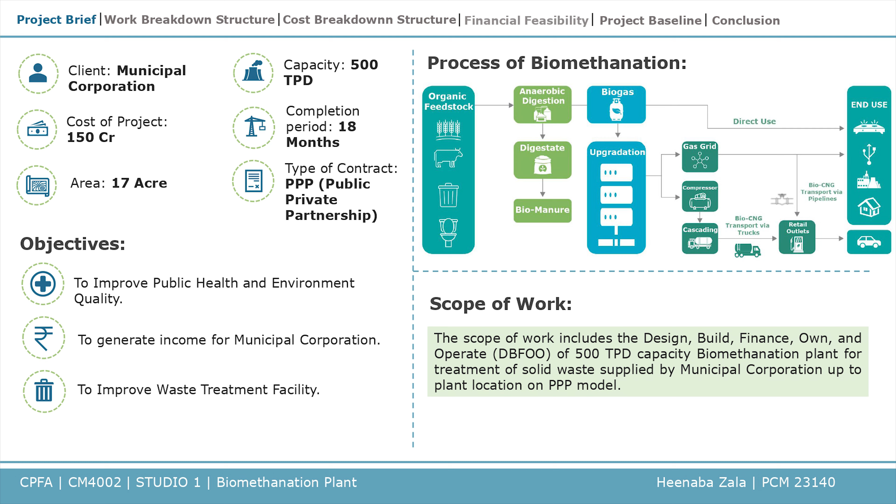Beginning with the work breakdown structure, this is an essential roadmap that breaks down the project's tasks into manageable parts. It helps us plan, organize, and track the work by dividing the project into smaller, more easily manageable units, which simplifies project management and resource allocation.

For our project, I have structured the work breakdown into phases: planning, development, design, construction, and operation and maintenance. In the planning phase, the feasibility study is conducted. In the development phase, both the client and PPP developer are involved, responsible for procuring architectural, structural, and MEPF consultants, as well as material and equipment suppliers and project management consultants.

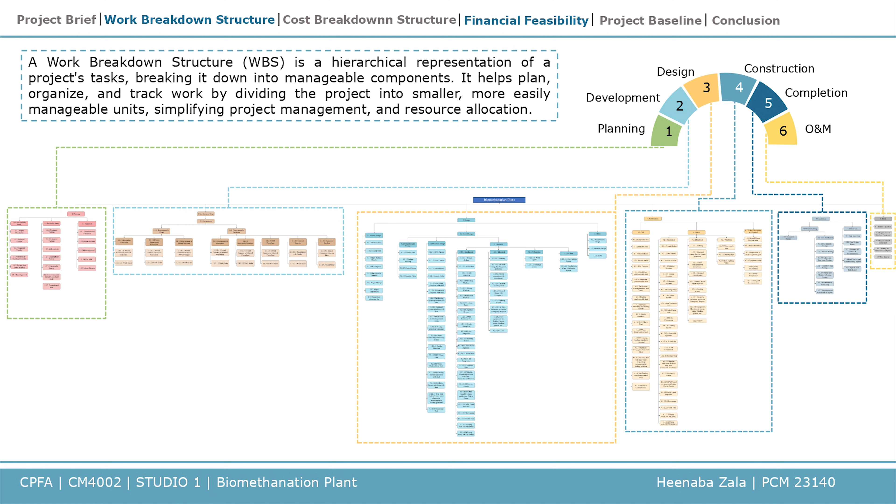Moving to the design phase, it includes structural, architectural, and MEPF design and detailed design processes. In the construction phase, it comprises civil and MEPF works with the project management consultant monitoring the project. In the operation and maintenance phase, this includes routine operations, repair of civil and mechanical components, cleaning of the digester, and staff training.

Moving on to the cost breakdown structure, these segments outline the financial aspect of the project. I am presenting the various costs involved, from material to labor, and how they contribute to the overall budget. The project costs are distributed across different phases aligned with the work breakdown structure. 0.4% of the total project cost is allocated for the inception phase, 2% for the development design phase,

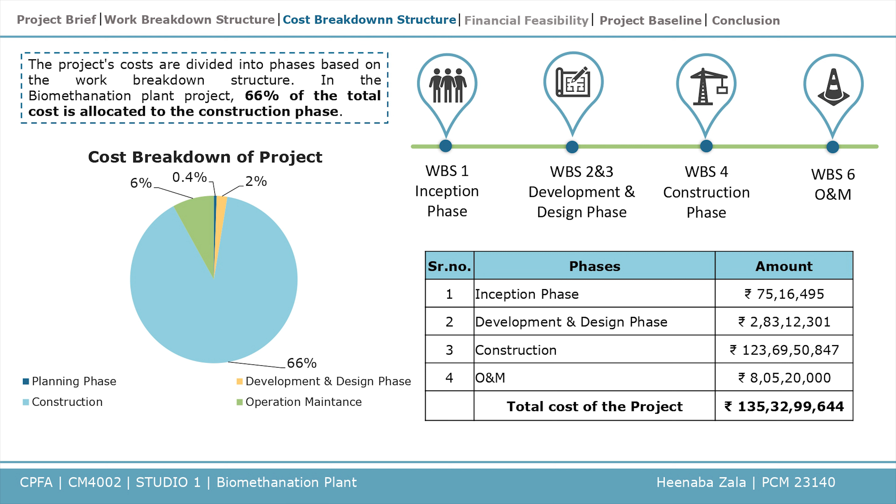and a significant portion of 66% is allocated for the construction phase. As for the operation and maintenance phase, I have considered only the first year cost, which contributes 6% of the total cost of the project. Through this process, I have determined the total project cost is rupees 135.32 crore.

Moving on to the detailed cost breakdown of the planning phase, 89% of the total planning cost is allocated for the feasibility consultant, while 11% is allocated for the approval process. These amount to a total planning cost of rupees 75.16 lakhs.

In the development phase, it is assumed that the notice inviting tender will be published in the newspaper at a cost of rupees 590 per square centimeter. So for a space of 100 square centimeters, the incurred cost is rupees 21.38 lakhs.

Moving to the design phase, 3% of the total design phase cost is set aside for the architectural consultant, 5% for the structural consultant, 14% for the MEPF consultant, and the majority, 78%, is allocated for the project management consultant.

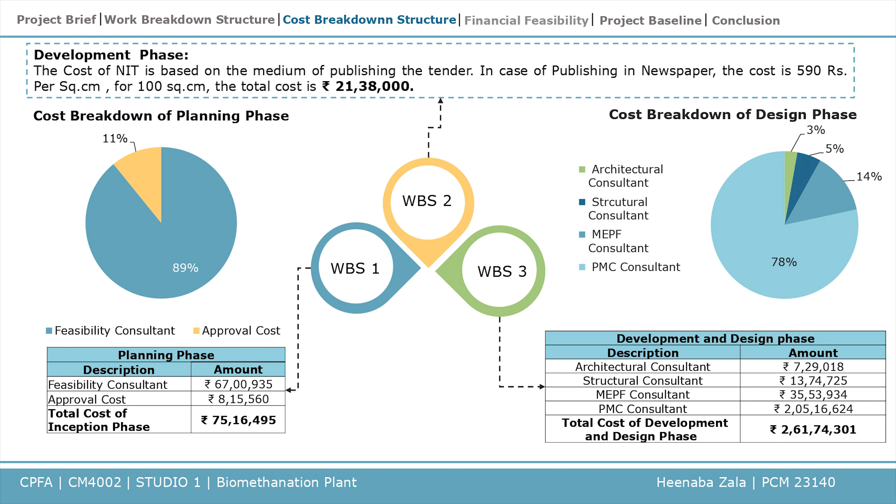In the detailed cost breakdown for the construction phase, 1% of the total construction cost is allocated for plumbing work, 25% for civil work, 24% for electrical work, and the remaining 50% for mechanical work.

This results in a cumulative construction cost of rupees 123.69 crores. Turning to the cost breakdown of the operation and maintenance phase.

In the operation and maintenance phase, 19% of the total operation and maintenance cost is allocated for the manpower required for plant operations, while 18% is allocated for repair of mechanical and civil components, and the majority, 63% of the cost, is reserved for electrical consumption necessary for plant operation. This totals an operation and maintenance cost of rupees 8.05 crores.

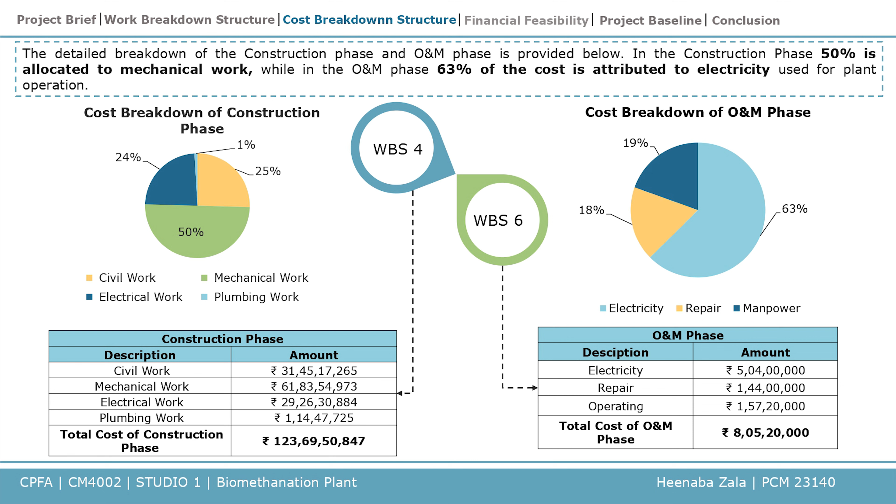Financial feasibility is used to find out whether the project is financially viable or not. An organization can make a decision with numerical values in terms of profit and loss by considering the economic feasibility. To assess the financial feasibility, I have made key assumptions.

In the first year, bio-CNG production is set at 67 lakhs 1400 kg, which is to be sold at rupees 46 per kg to CNG stations. Production is expected to decrease by 3% every 5 years due to machine wear and tear.

In fertilizer production, in the first year, it is projected to be 1 crore 82 lakhs 50,000 kg, which is sold to the fertilizer company at rupees 8 per kg over a period of 20 years, and there is an anticipated 5% reduction in production every 5 years due to machine wear and tear.

An annual royalty will be paid. Royalty payment of rupees 2.52 crore will be paid to the municipality corporation over the period of 20 years, and the operation and maintenance expense is estimated at rupees 1.44 crore with a 2.5% increase every 3 years.

Additionally, we have assumed the client will provide the land free of cost for the 20 year period, and the client will provide water and electricity for the plant operations. Based on these assumptions, I have calculated both the cash inflow and outflow for the project.

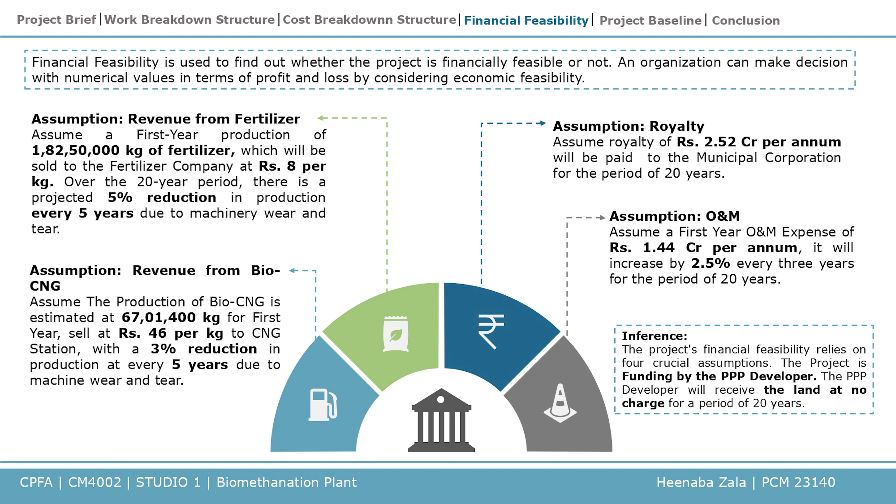In the project's financial evaluation, the cash inflow includes rupees 30.82 crore from bio-CNG revenue in the first year and rupees 14.60 crore from fertilizer revenue for the first year.

The cash outflow includes rupees 127.27 crore for capital expenditure, rupees 2.52 crore for royalty expenditure, rupees 3.22 crore for electricity consumption expenditure, rupees 1.44 crore for operation and maintenance expenditure, and rupees 1.57 crore for salary expenditure.

Using a 12% discount rate and 5% minimum acceptable rate of return for the greenfield project, the internal rate of return is calculated to be 23%, and the net present value stands at rupees 158.31 crore. These results confirm the financial viability of the project.

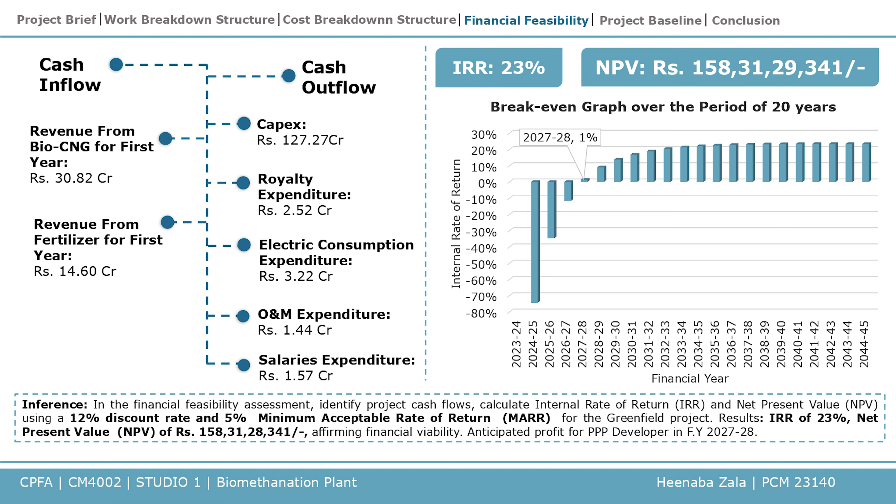Additionally, there is an anticipated profit for the PPP developer in the financial year 2027-28. So now let's dive into the project baseline, which serves as the bedrock for the project plan. It outlines the crucial milestones, timeline, and resource allocation, which provide the roadmap for tracking progress.

In the establishment of the project baseline, certain assumptions have been made. The project start date is set for 29th September 2023. Work will be ongoing throughout the wet seasons, and all necessary materials will arrive as per schedule.

The project baseline, aligned with the work breakdown structure, determines the total planned duration of 8,090 days, and notably 450 days are specifically allocated for the construction of the biomethanation plant. This baseline provides a solid framework for project management.

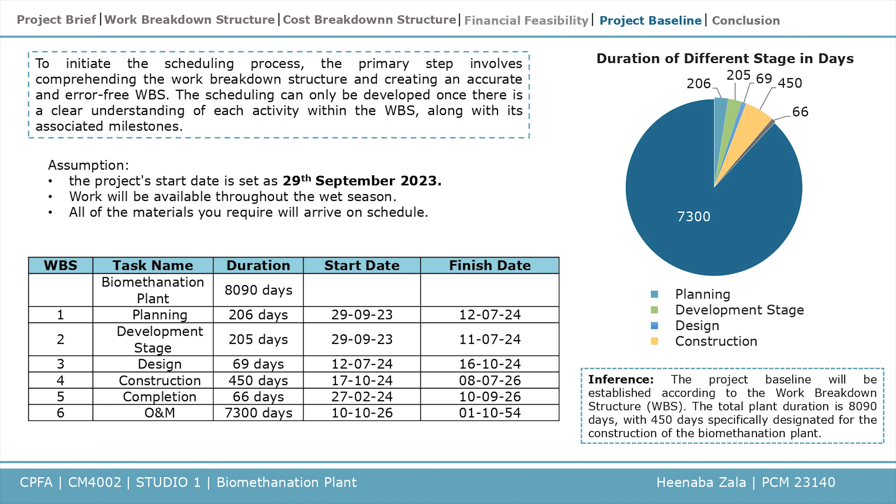Significant milestones have been identified for each phase, namely planning, development, design, construction, and completion, serving as critical points to monitor the project's progress. In the planning stage, the milestones comprise the feasibility studies and subsequent approvals.

Transitioning to the development phase, key milestones include the procurement of the feasibility consultant and the procurement of the developer. Moving into the design phase, the milestones are marked by achievements such as the structural and mechanical designs.

Within the construction phase, the critical milestones involve completion of the RCC digester, installation of the double membrane storage balloon, and implementation of MPSA technology. As the project nears completion, the milestone in this phase is obtaining the consent to operate.

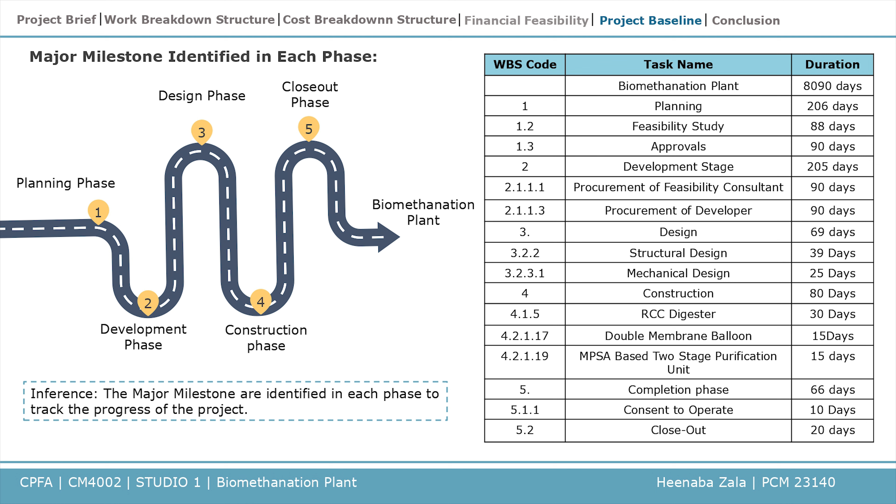Summing up the feasibility study, I have identified key insights and addressed the challenges while emphasizing the overall viability of the biomethanation plant project.

In the work breakdown structure, it serves as crucial to systematically break down the project tasks into manageable units, and this hierarchical approach simplifies planning, organization, and monitoring, facilitating effective project management and resource allocation. The project is structured into 6 different phases.

In the cost breakdown structure, the cost estimation for each project stage was derived from the work breakdown structure, revealing a total project cost of approximately rupees 135.32 crore. Notably, the construction phase contributes 66% of the total expenditure, while the operation and maintenance phase accounts for 6%.

In the financial feasibility, the project relies on 4 key assumptions, which include the PPP developer funding the project for 20 years and the provision of free land by the municipality corporation.

The financial assessment indicates a robust 23% internal rate of return and an NPV of rupees 158.31 crore at a 12% discount rate, complying with the 5% minimum acceptable rate of return. These confirm the project's financial viability with anticipated profit for the PPP developer in the financial year 2027-28.